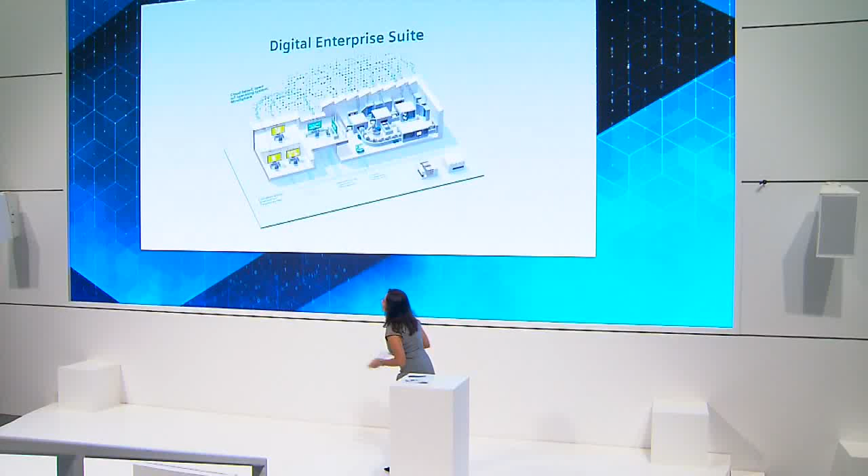Here we are, ladies and gentlemen. Welcome to our presentation, Digital Enterprise in the Manufacturing Industry.

I know what you will be thinking now: oh no, digitalization again. Well, it's our motto, but Christine, still. I don't like it when you talk negatively about digitalization because we're living in some really exciting times. And you don't look like a woman who wants to live in the past, you look like a woman for now and for the future, right? Well, of course I adapt to changes, but still, not everything was bad then.

You're right, Magnus. Remember vinyl, when we were listening to records, the little crackles and the really good sound, and you were sitting there watching the covers, looking at the sleeves. Yeah, vinyl is going through a revival for good reasons, for sure.

Analog music is very nice, but I think you're forgetting all those nights you sat there with rec, pause, and play, trying to rip those albums, putting together a mixtape for your morning run, listening to it in your Sony Walkman, because taking one of those on your back for a run wouldn't make a lot of sense, right?

That's true, this is when music got digitized, right, and then CDs came into the picture. Exactly, and digitize is a good word because that's what happened - you take something analog and turn it into digital. That's digitizing. But we're talking about digitalization, somewhat difficult to pronounce, but I'm getting there slowly but surely.

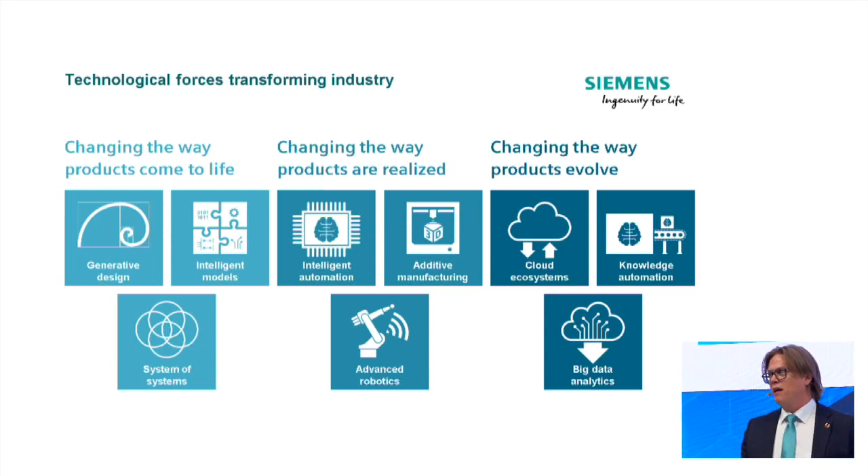Products and how they evolve has also changed over the last years. Cloud technology - most of you are probably in the cloud, storing data. But it's so much more than just data storage. It's also about analyzing data and feeding the insights back into the value chain, so to speak, in the process of development of your product. So if you want to take advantage of this, you need to look into the ideation, the realization, and the utilization phase of your product development process.

So to get the most out of this, you need to look at the entire value chain, which goes from product design all the way to services, and weave a digital thread of information through the entire chain.

And then it's transforming, and you may ask yourself, why is this transformation necessary? Well, it's probably the only way to react to those constantly changing products. The complexity goes up the whole time. And apart from that, it also gives you the tools and the means to actually produce faster, shorten cycle times, and of course enable a lot more innovation.

And we call this a holistic approach. This is what it looks like. It's enabled by Teamcenter, which sits as a fundament beneath. It's a collaboration platform for data communication. And we need that in order to make data flow from design all the way to services.

And behind it, we've got MindSphere, our cloud-based open IoT operating system. By analyzing data, we have the ability to feed that back into the process and constantly optimize it.

Another nice thing that happens when you have gotten this far and your steps are all aligned is that this digital twin that you may have heard of is actually available. So what do you need a digital twin for? Well, it's basically a digital environment of the real world in which you can design, test, simulate, optimize, validate, and do pretty much everything you would like to do in the real world without consuming any resources, without building any prototypes, etc.

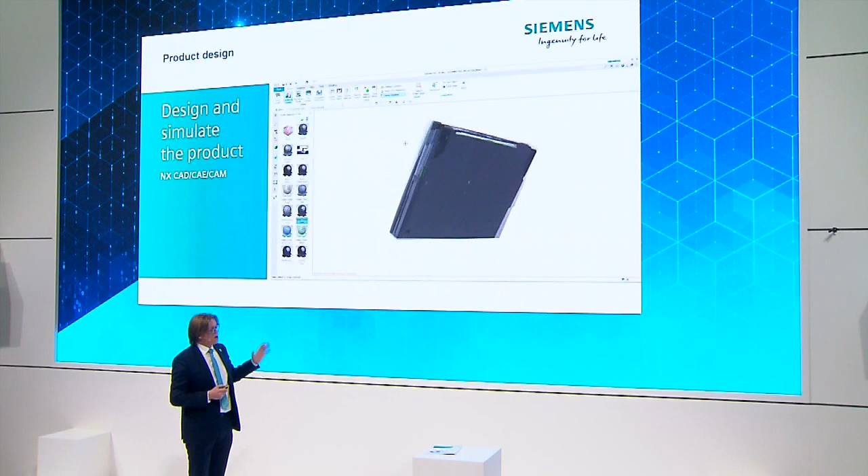It's a very sturdy laptop. It can take some good beating if you like. And this is something you see also at the booth, this PC. So let's say you want to design or develop this type of laptop. Then you could go into our NX system and construct it, basically taking this laptop from the first idea, the first innovation, through the design phase, industrial design, constructing, and doing everything you need, all the way from simulation to manufacturing planning.

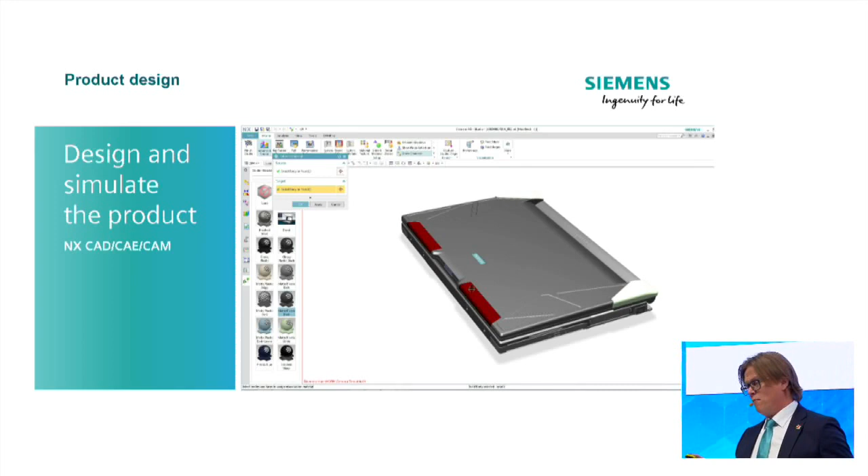Let's look at simulation. A computer like this has got a processor. A processor is working, a processor is generating heat. And we want to make sure that not too much heat is being generated within the housing of this laptop. So we're simulating the physical behavior of this processor and this cooling bracket that you have there.

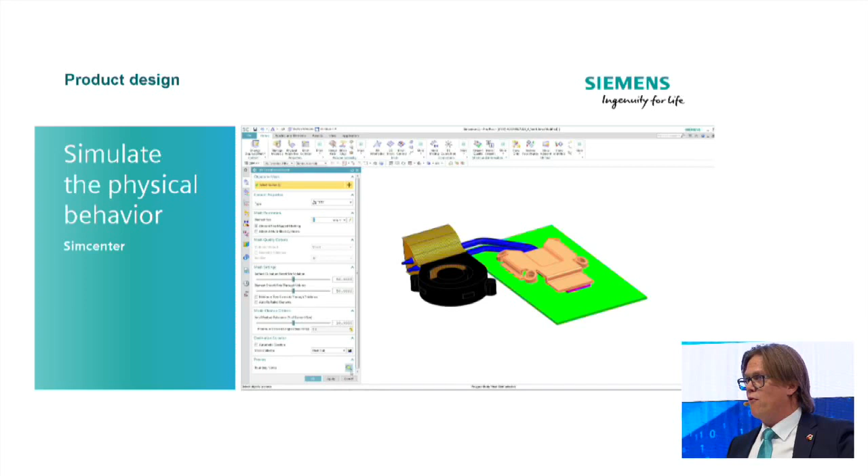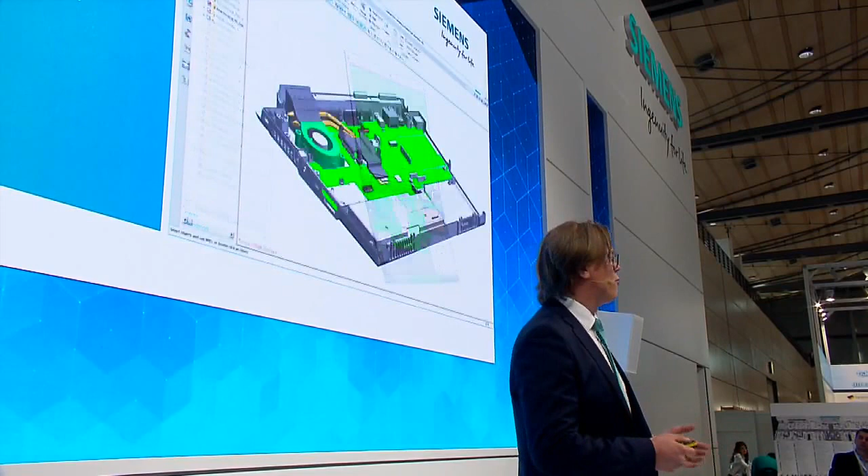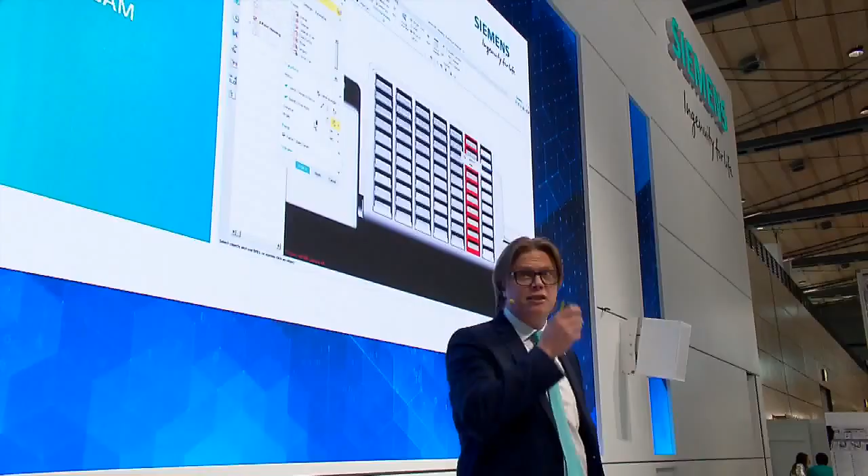If we now realize that it's way too much heat being generated, we need to do something about it. What could you do? Smaller processor? Sure, but less performance. Or you simply change the size of the cooling bracket. And since you're working in an associative environment, you basically go back to the engineering phase and stretch this bracket out, and perhaps even add a cooling hole on the side of the panel by simply copying and pasting. This is made possible thanks to synchronous technology within NX.

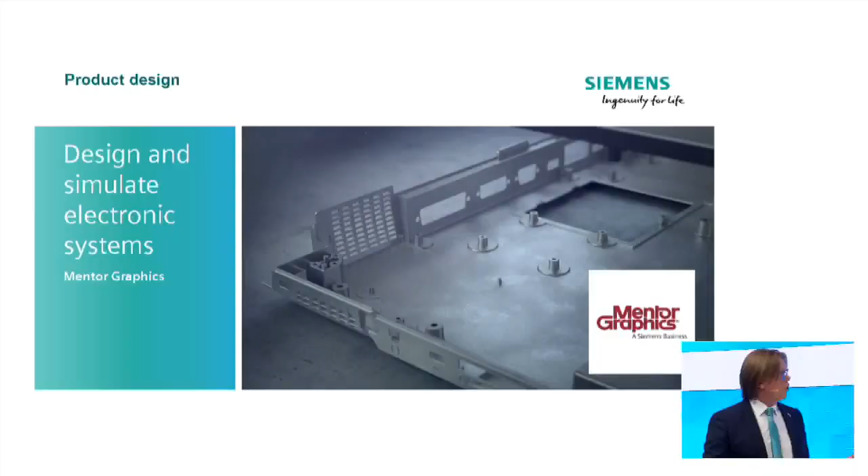Simulation of parts is something we've done for a long time, and some of you may have heard that we got a new family member here at Siemens - that's Mentor Graphics, which joined us just recently. And with that, we do also offer solutions for designing and simulating electronic components in product development.

And with that, we have created the digital twin of the product. I'm going to move on into the next stage, the production planning. So we have the data sitting in Teamcenter, and of course we will do the process planning or production planning in the same environment, basically merging the product with the resource, the plant, and the process.

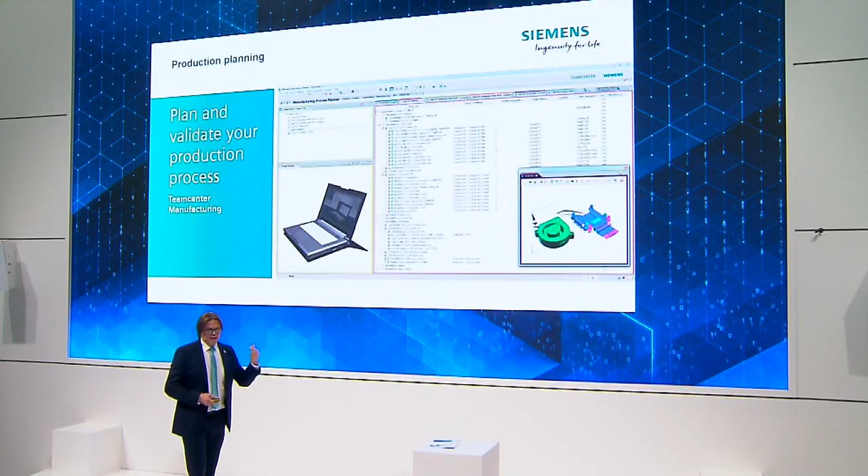And when we have this bill of process, as we call it, we can go ahead and simulate the worker's environment, for example ergonomic analysis, making sure that our colleagues on the shop floor who are assembling the laptop aren't getting any work-related injuries or fatigue or similar.

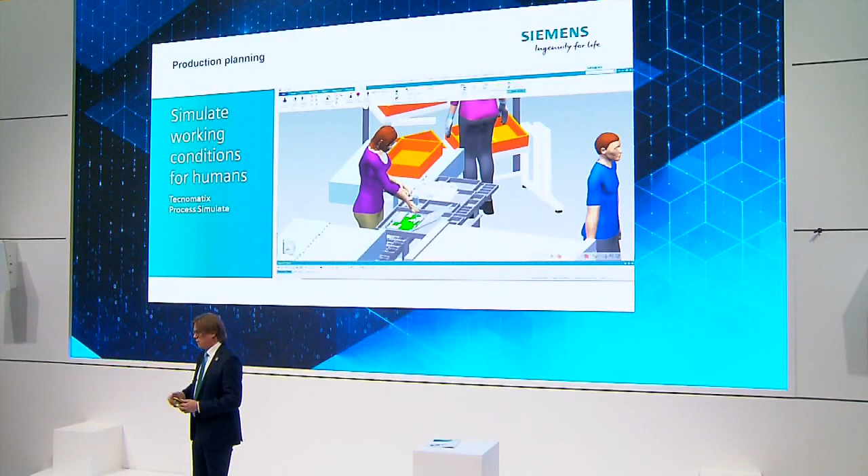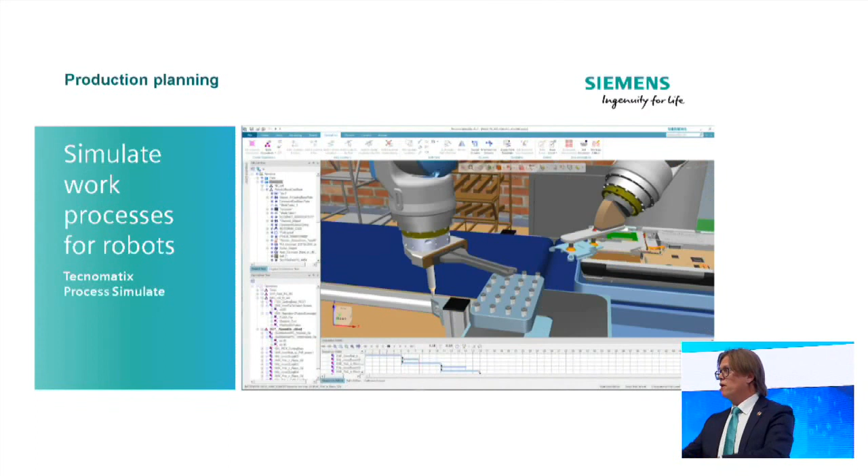Or perhaps we get a robot. Then we can use the same environment, but instead of a human, we use a robot, like this dual-arm robot, to do more or less the same type of operation.

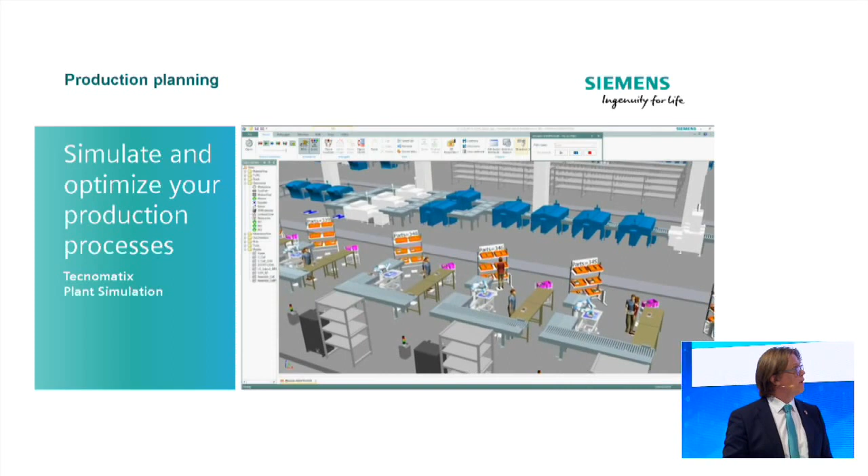Simulation can also be done in a bigger scope, a larger scope, let's say an entire facility, in order to discover bottlenecks, scaling the buffer zones, perhaps even discover and analyze how much energy is being consumed inside our factory with energy simulation, and use this information to further optimize our real production.

And at this point in time, we probably do also have a few machines and production lines in this environment. And thanks to automated engineering, we can basically take the information from this simulation and push it into our engineering framework, the TIA portal.

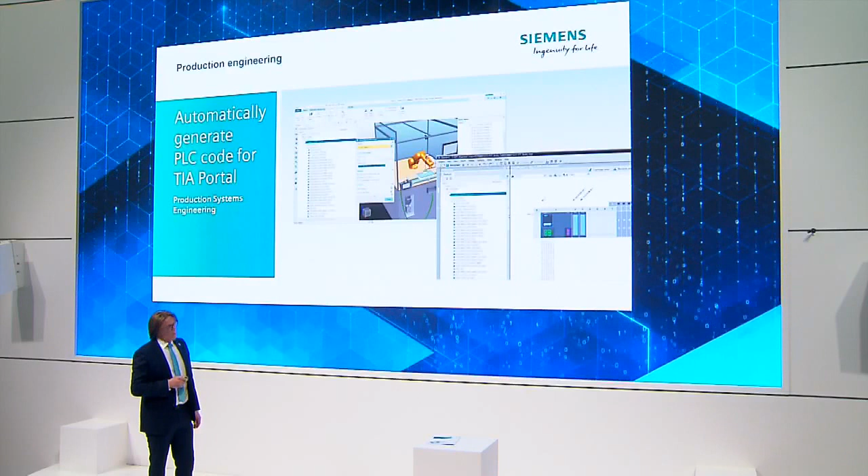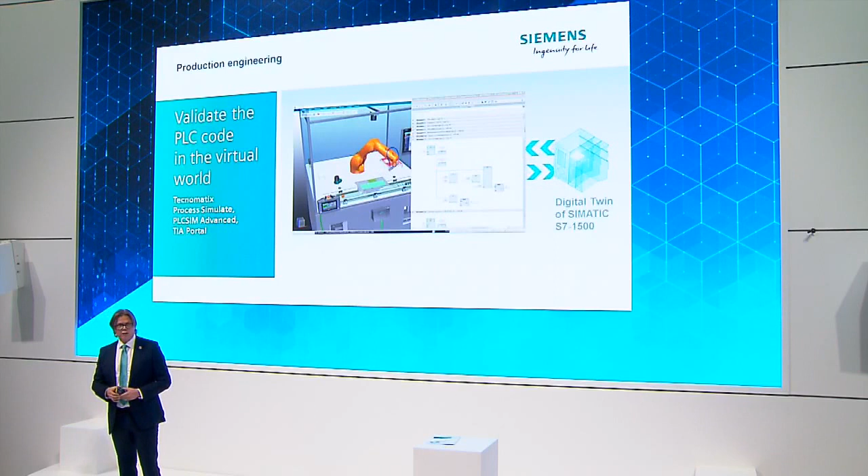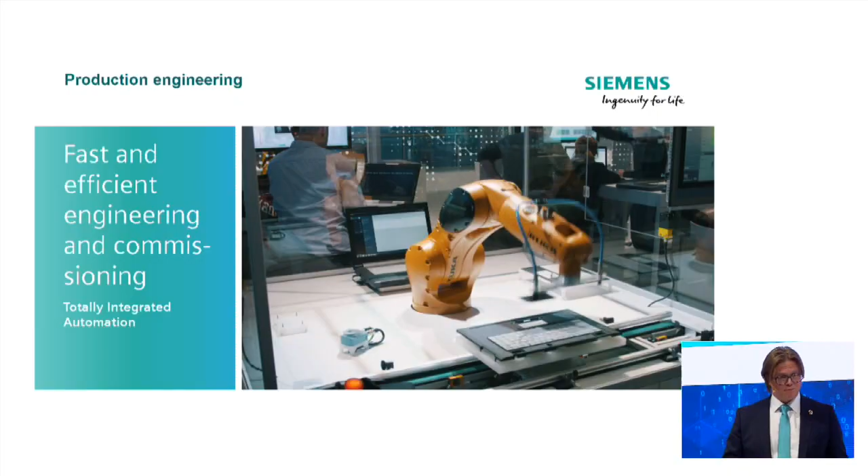And with that, we can take it to the next step and do what we call virtual commissioning. So working with a digital twin of our S7 1500 controller, PLCSIM Advanced, a TIA portal, and Process Simulate from Tecnomatix, we can validate and debug this code digitally, which means that when we want to go for a real production, we basically take this controller with us to the shop floor, the code, and we get a very short commissioning time.

And the rest of the engineering is, of course, carried out in our TIA portal, our engineering framework. And thanks to world-leading automation products from Siemens, the production is obviously running smooth and efficient. And with that, we have the digital twin of the production.

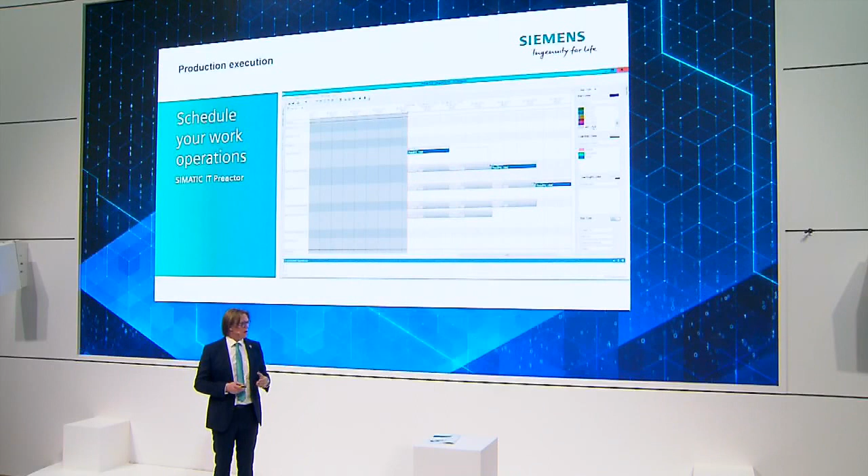At this point, we're going to start producing the laptop for real. And at this time, you may also have to optimize this environment. You have orders coming into your factory, and you want to make the best out of those orders and make sure that you're as effective as possible.

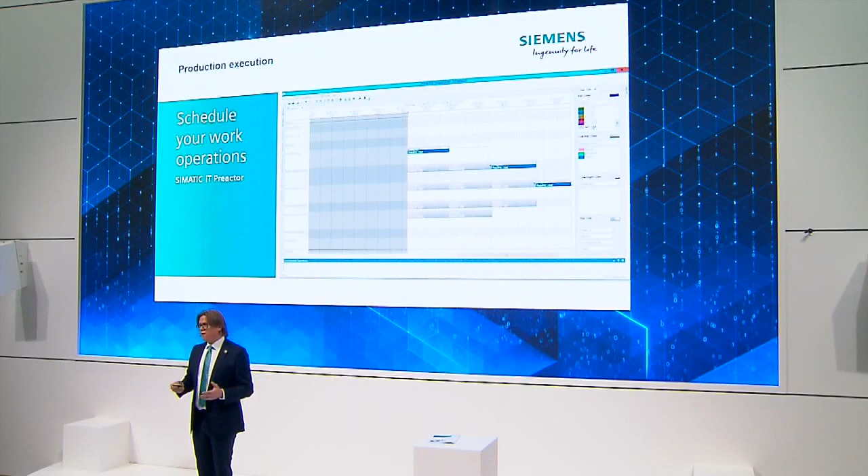And this is Simatic IT Preactor that you use for advanced planning and scheduling. To get efficient, to reduce time, to build quality, you may also need work instructions. And this is also something you would get via Simatic IT MES solutions from us.

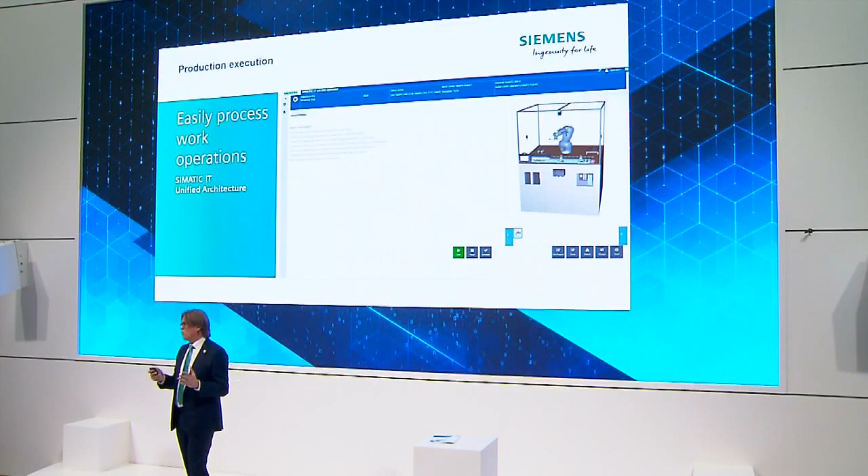So the picture you see here on the screen with the robot, it's kind of a spin-off product from the production planning phase, because you can add movies, you can add PDFs, pictures in this environment to support the colleagues on the shop floor when they're building this laptop.

Quality, also very important. So throughout the entire manufacturing process, you're able to track the quality. So if one of those values would go out of bounds, you could be reacting to that, or be proactive even, making sure that the product that leaves the belt is actually already ready to go, and no quality surprises will come your way.

When producing products, we produce a lot of data that is of great value, and data we want to use. And with MindSphere, our cloud-based open IoT operating system, you collect and analyze the data and transform it into valuable knowledge and feed it back in the system.

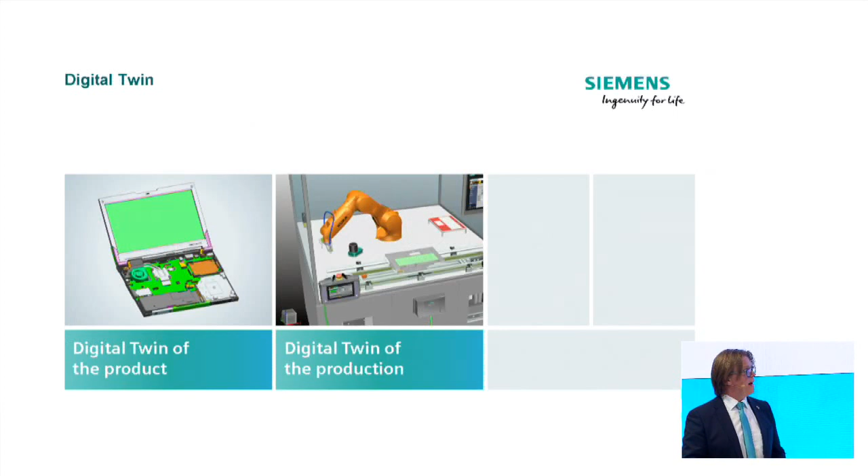So with that, we have our 3 digital twins from the product, the production, and the digital twin of the performance. At this point in time, we start optimizing the whole thing, pushing this know-how back into product development and production planning. And the cool thing is, we're doing this on one integrated data model, Teamcenter, and that's where all those 3 twins are sitting.

So, which allows for all stakeholders involved in the development process to always have access to the latest, the release data, and can take that decision that's required to get even more efficient and deliver an even better product.

So you may ask yourself, what do we need in order to enable all this? Well, we call it the Digital Enterprise Suite. And this is what I've been talking about the last 10, 12 minutes.

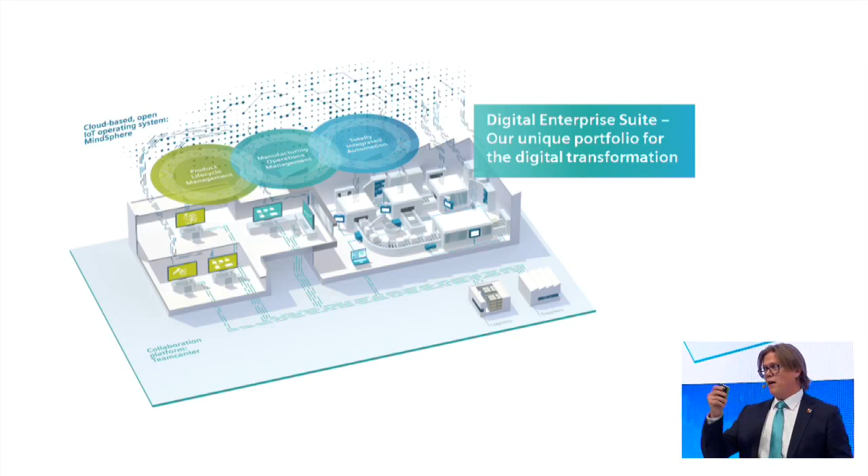Teamcenter as a collaboration platform. On top of that, you get the product lifecycle management environment for design, simulating, MOM, manufacturing operation management, for communicating this information down to the shop floor, where we got the totally integrated automation portfolio, and behind it all, MindSphere.

So with this, you would be able to shorten the time to market, allow for flexible mass production, customized mass production, prove that you are producing quality, take advantage of the resources available for you today and get even more efficient, and at the same time, protect your company from cyber attacks or losing intellectual property.

So to become the game changer, you need to be realizing your digital transformation. This is the way forward. The Digital Enterprise Suite will also make the future yours.